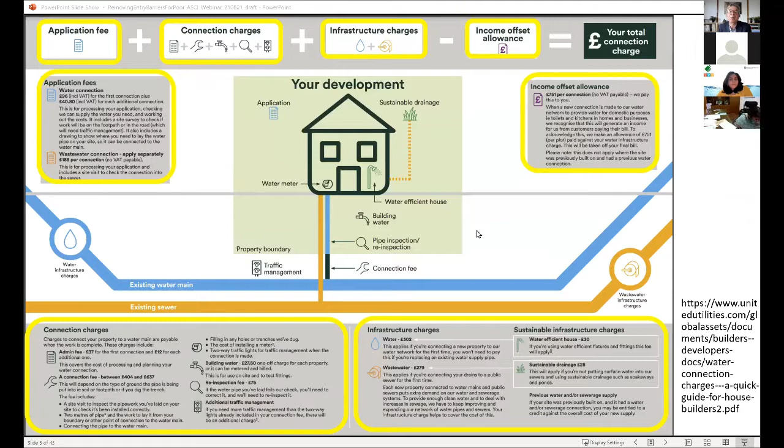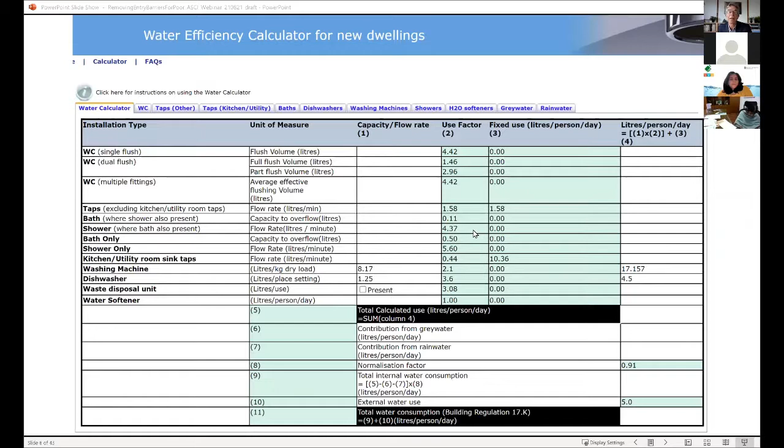So I was showing this complicated diagram of a conventional water utility building up the various costs between application fees, connection charges, infrastructure charges, and this new thing called offset allowance, and also allowance for having water efficient baths and showers and WCs within any house. And showing here, hoping it is still working, in yellow, you can see that the water infrastructure charge, which is the charge to get the fixed assets to the right level, has dropped by 90% because developers and house builders are showing they are using water efficient fittings.

And then this income offset allowance, very strange thing, but saying the utility is making business out of this connection, it should make some allowance for that business. On this particular one, £751 per connection offset allowance. And part of the reason for showing this is everybody changes official connection fees to suit whatever policy is most important. It doesn't matter how you do it, but the policy has to be there and you adjust the connection charge accordingly.

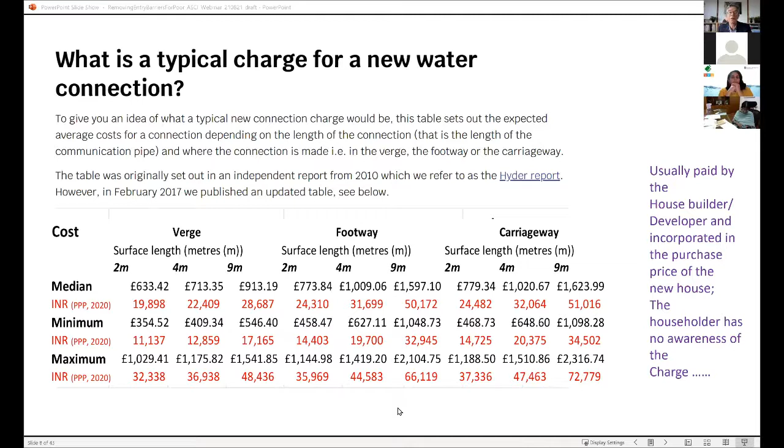In my country, I've put in here, converted it through purchasing power parity to rupees to give you a sense of the different connection charges overall before some of those reductions. Very much depend upon the type of road or footway it is in. These things do make a difference to the water company, but they will have to learn to overcome it.

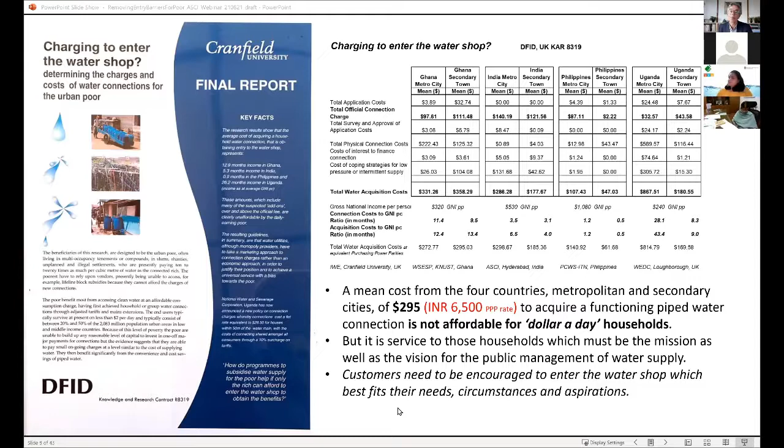But we did find in that study this average $300 connection fee, which is utterly unaffordable to $1 a day households. Within that, the friends in National Water Uganda recognized there was a challenge there, and they put a surcharge of 10% on the overall water tariff, and then said there will be free connections to households within a distance of 50 meters, apart from the cost of the actual meter itself.

When they started, they were only doing 1,200 connections a month. When they changed it, at that time doing 2,000 per month, and overall, National Water had reached 530,000 meter connections, up from 50,000 over a 20-year period. Connection charges is absolutely critical.

It makes a difference. Buenos Aires, Argentina, a middle-income country that privatized. They had connection fees of $500 for water. I'm picking up the JS's point about sewerage, but $1,000 for sewerage, which was cost reflective, but nobody could afford to pay it. And so in the end, they set up a $2 a month charge to all customers. So the service connection charge for water and sewerage could be reduced to $120, and that was paid at $4 a month. These are the sorts of automatic things people are doing around the world, just as you are describing very clearly.

Some people have tried to escape household connections by doing electronic prepaid meters. Very nice, very well received by customers. They tend to break down rather often. South Africa had this experiment with filling up a 200-litre barrel once a day. Lowest cost, quite a clever way of doing it. An issue we'll come on to in a moment about how you manage consumption.

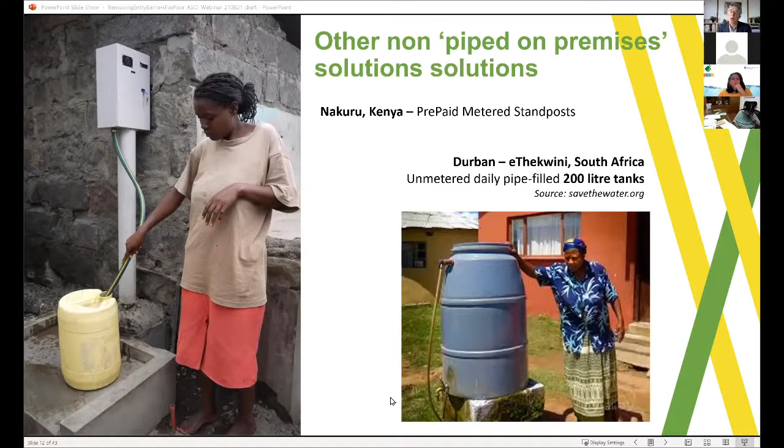Some people have been trying kiosks as a way of serving the poor. I think many examples in India as well. This one in Sierra Leone, a sophisticated point of collection treatment system as well, with prepaid meters. But the challenge in all of this, if you look at it, the cost of a water kiosk and the attendant was actually more than giving everybody a household connection. We were getting trapped in old technology, old approaches. We have to move forward.

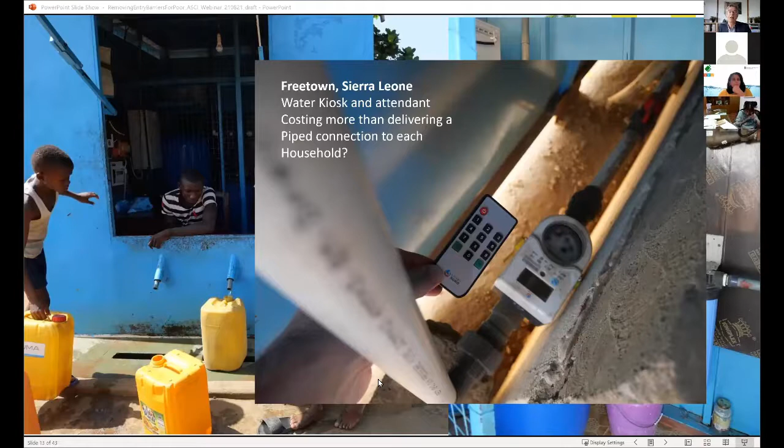Manila, Philippines, beginning to use meter banks, sometimes put on the boundary of informal settlements. If the municipal council didn't allow slum dwellers to be served directly, they could put these on the outside of the slum area, and then each household would individually put their own flexible pipe connection to their own meter, but more expensive than it needs to be.

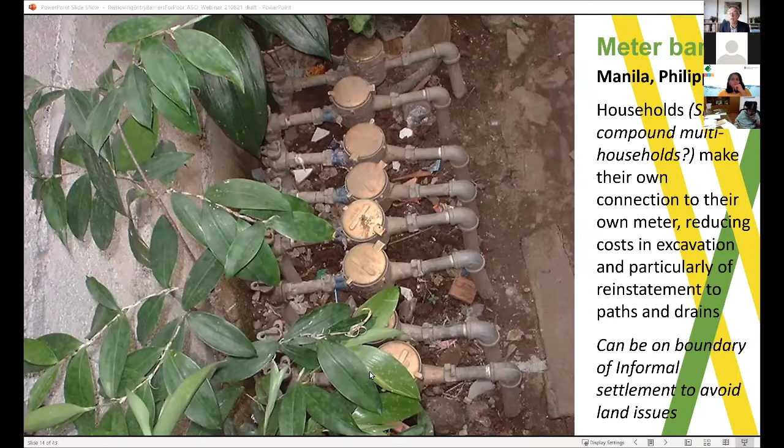Somebody was asking in the questions about how do we get pipes into informal slums? And I heard the JS say, pipes are incredibly flexible, going through very small, narrow passageways. It's only when we get to sewerage that people in Buenos Aires, for example, had to start rearranging slum houses in order to get straight runs for sewerage. For water, it is not a problem.

And so options for paying, I think we all know these: pay the full costs now, pay the full costs over a period, pay using a small loan through microfinance. For the low income, a specified group, pay only part of the costs with the remainder as above. These are the patterns we see in the world. And for a specified low income group, I believe the connection is simply provided free of charge up to the meter, and even better with a tap already included.

The costs not borne directly by customers, partly by being funded by an increased volumetric tariff, or by government or donors increasingly using an output-based aid, payment by results approach, as already mentioned. Only when the connections are in does the money get released.

Why are we doing all this? Just to remind us, why am I saying zero connection fees? We have to develop and deliver public health. That is the job of a public water provider. The rich can always get enough water. It is our task to get water to the poorest to protect public health. We can only do that by 100% connections, only by the utility getting on with the task. But yes, only in designated lowest income areas. Middle-income areas, developers doing expensive houses have to pay their full share.

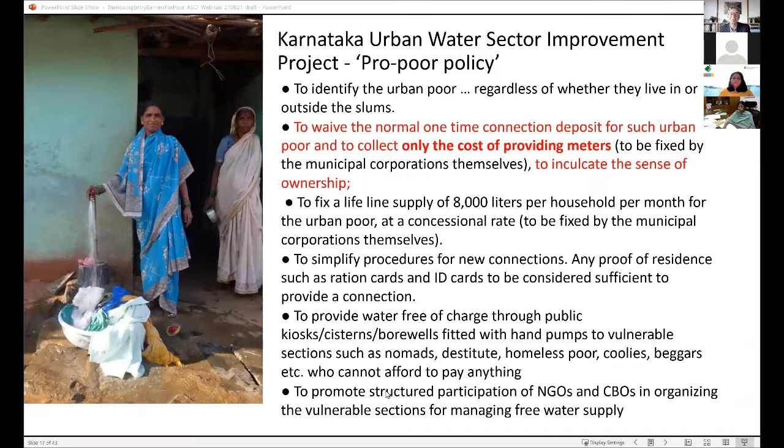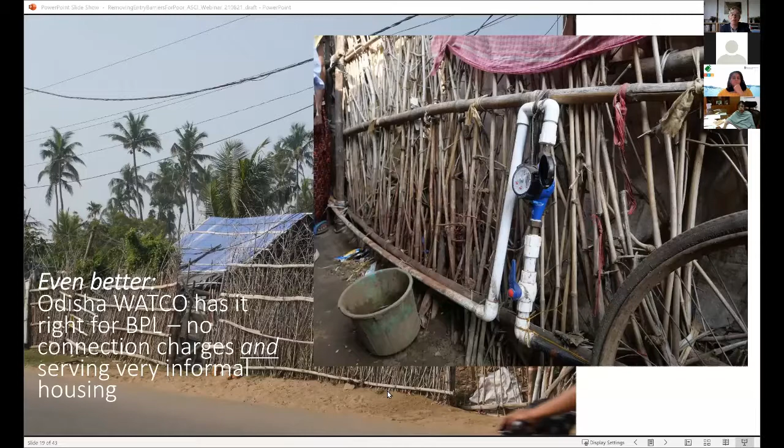Odisha Watco has it right for below poverty line households, no connection charges. It is happening, and even better, Watco has it right, even serving very informal housing, these ones in Puri, and finding a solution when there is no fixed wall to put a meter against. This is impressive, this is good, and it's better than most of what I've seen in the world, even in very simple houses. But I want to bring in this but.

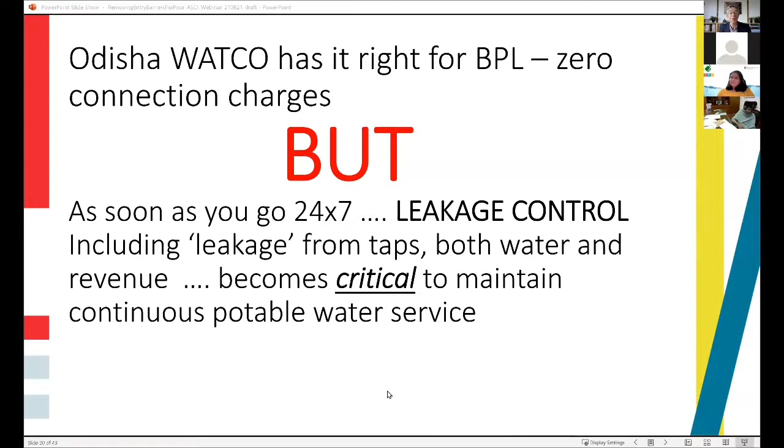As soon as you go to continuous 24/7 water to very low income households, as well as to middle income households, leakage control becomes critical to manage. Leakage of water and of revenue, if we're going to maintain and sustain continuous potable water service. And I would argue that the right to a free connection also comes with responsibilities.

Two critical responsibilities: one for the household, who have to learn how to use water wisely and to pay the affordable tariffs, and the service provider responsibility is to enable and support the household to manage the water and bills. And they won't do it without additional support. This is what global experience tells us.

So unless we help customers, low-income customers particularly, manage their leakage, and examples I have seen in Bhubaneswar where a small business washing cars and motorcycles was being done off a free connection. We have to be able to manage that sort of consumption, having given free connections. And so I came up with what I would call an ideal pro-poor, below the poverty line, house connection. Too many words there, so I put it next to some pictures, most of them from Bhubaneswar to start with.

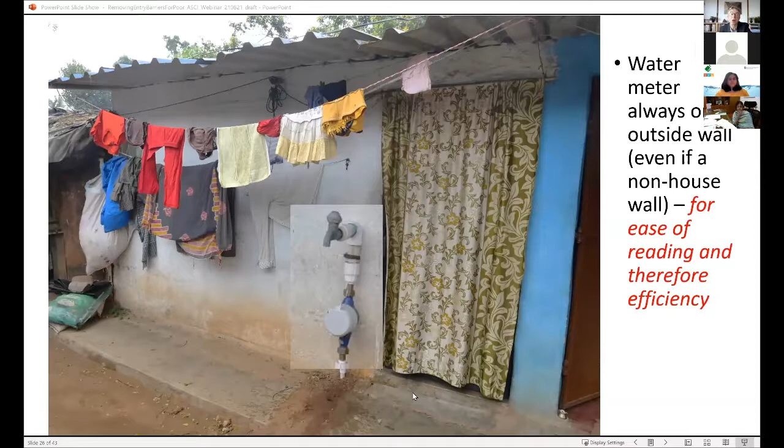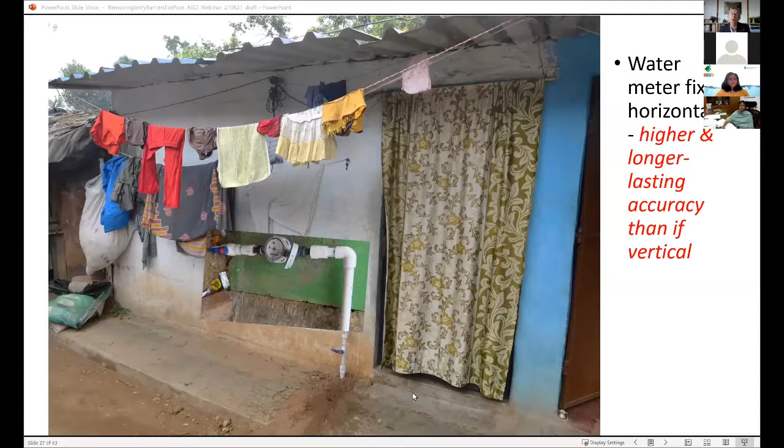Interestingly, it's usually recommended to fix water meters horizontally. They stay accurate for longer than if they are vertical. If you get best quality meters, it doesn't seem to matter so much, but with medium quality, making them horizontal is the normal way. I've not seen that so often in India.

And a tap on the end, and I would recommend for low-income houses that where the tap is situated, there is a T connection. So the pipe is ready to go through into the house itself in order to have drink from tap capability inside. The household will decide when it wants to do that. But not only does that give convenience to the customer, and if we're drilling for pipes anyway, it takes 10 seconds to drill through the house wall and make it available, but also that strengthens the whole assembly of pipes; the meter and the tap are more fixed to the outside of the wall because of that T going through internally. It works two ways.

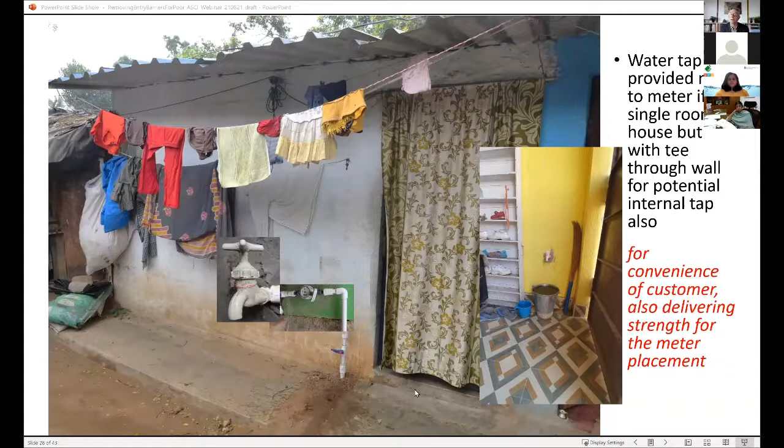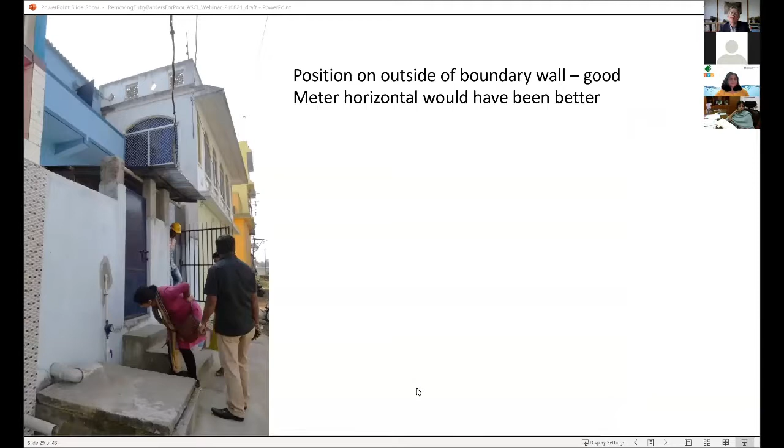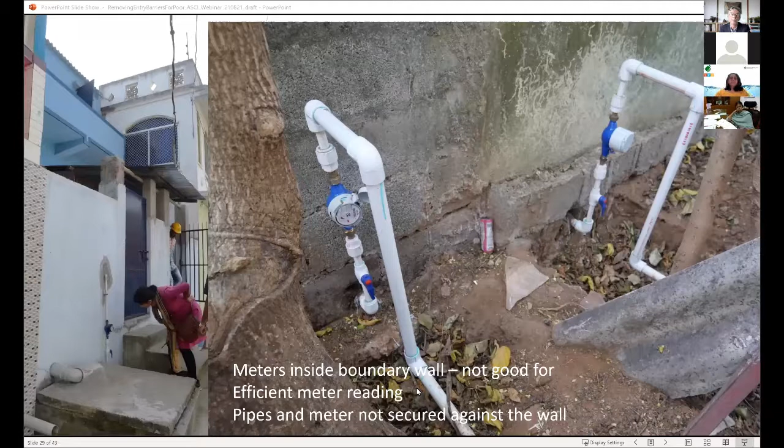This example here, yes, it is on the outside of the compound wall, so it can be read. This example is inside a compound wall. They can't be accessed by meter readers or Jalsathis easily to monitor consumption, and the pipes are very vulnerable to damage, not being fixed to anything. There are now moves to use special containers to put meters inside walls for lower middle income households who have that extra wall. So they can be read from the outside, they are protected, and the water comes through the backside inside the house. These sort of ideas could be thought about.

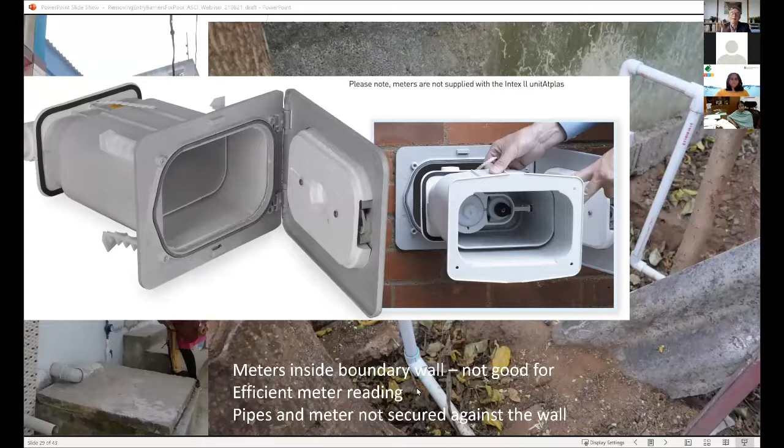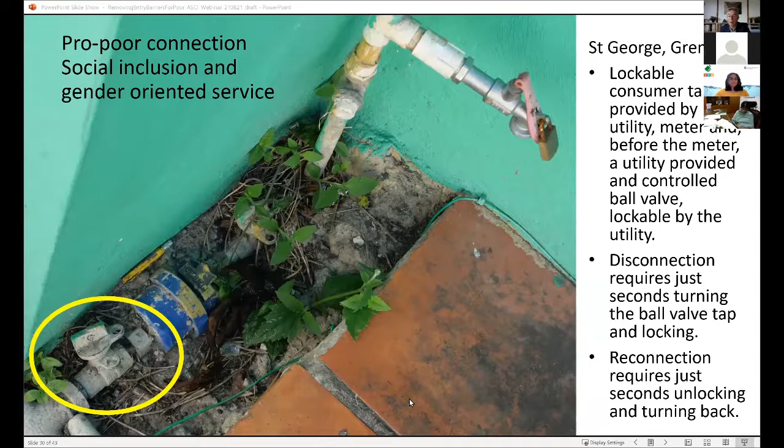Then something I've shared with some of you before from Grenada in the Caribbean. Not only does this have a lockable consumer tap, it also has a lockable meter tap provided by the utility. So disconnection requires just seconds, turning the ball valve and locking it, and reconnection, you open it up again. How to ensure the rights and responsibilities of low-income households are managed.

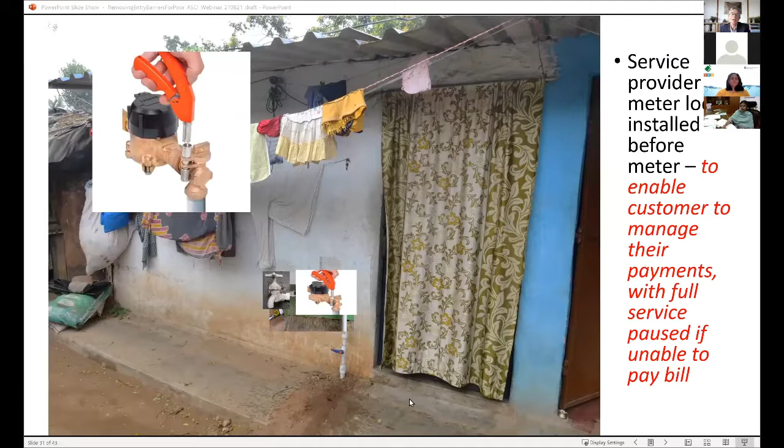And here is my little picture building up. We have the tap, we have the horizontal meter, we have the lockable meter to enable customers to manage their payments so they don't get into debt and they don't have challenges of full disconnection, which we all want to avoid. And to build into that, something I didn't mention last time we shared these ideas, you can build in a trickle valve. So it's not being fully disconnected, but it's less convenient. And then rather than filling a 10-litre bucket in a minute, you might get a cup of drinking water over 10 minutes. Drink from tap remains.

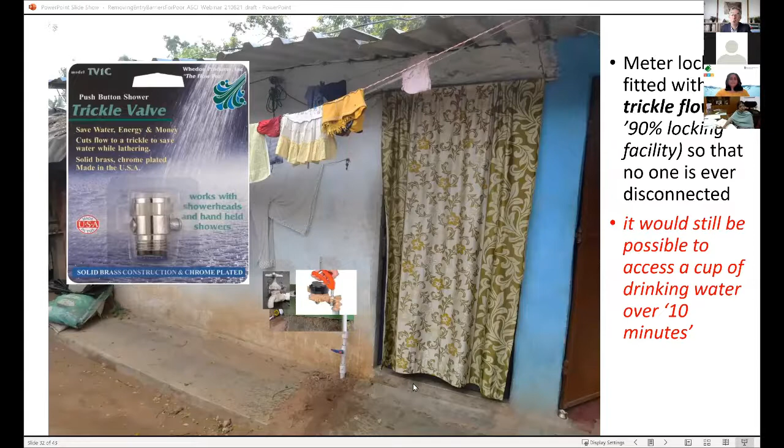No one is ever fully disconnected, but we are managing the process and enabling people to manage their water bill and long-term conservation of water and revenue. Disconnections have been banned in my country, and I sometimes say the utility spends as much time on debt collection now, as it doesn't have this lever, as it does on water supply.

And as well as a security deposit, I recommend that part of the connection process is registering the mobile phone number. I don't know if it's 90% of people in a slum would now have a mobile phone or higher, you can tell me. But with that registration, they can then receive bills and reminders, and they can pay through mobile money, micropayments, to ensure their bill is there.

Having paid the security deposit, the utilities now should never be in debt to these customers. They should always be positive, because the process will then be managed so that if they're going close to using up the security deposit, you can then ask the householder to do a micropayment and top it up again. An analog prepaid meter, mobile money, micropayments.

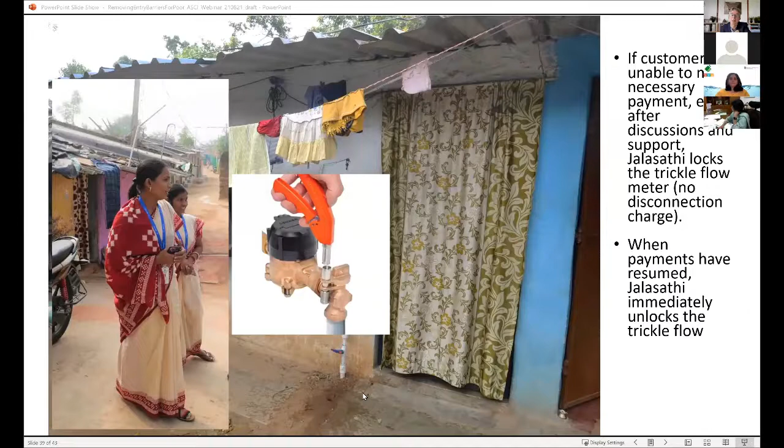Thank you for the time. This was my summation of my ideal pro-poor BPL house connection. You're most welcome to argue against every point, but the reasons for doing it, I think, are very valid and things we have to think about. Thanks, Shari. Back to you.

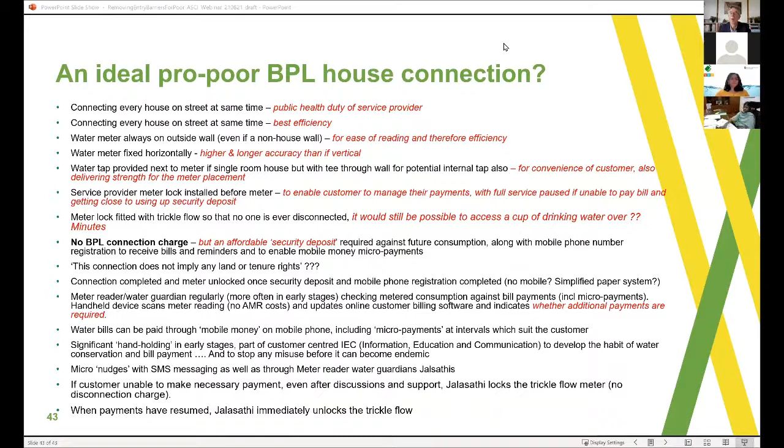Thank you, Richard. We will share the slides, of course, for delegates here, because there are some very, very meaningful lessons for practitioners. Some of the ideas about trickling the flow, putting a small gadget to, instead of a disconnection, lower the flow. I think these are some very good ideas that are available in India. It's no longer international. These technologies, these solutions are already available.

The next event, the leadership seminar that we are going to do, is precisely on those. The practical startup solutions that can be low cost, but very, very high impact solutions that are available in India, made in India, tested in India, and also they can be replicated in India. For example, the gadgets that you mentioned actually are used in Mission Bhagiratha in Telangana to reduce the flow, but not disconnect. So I think these are very, very useful ideas. Thank you very much for sharing.